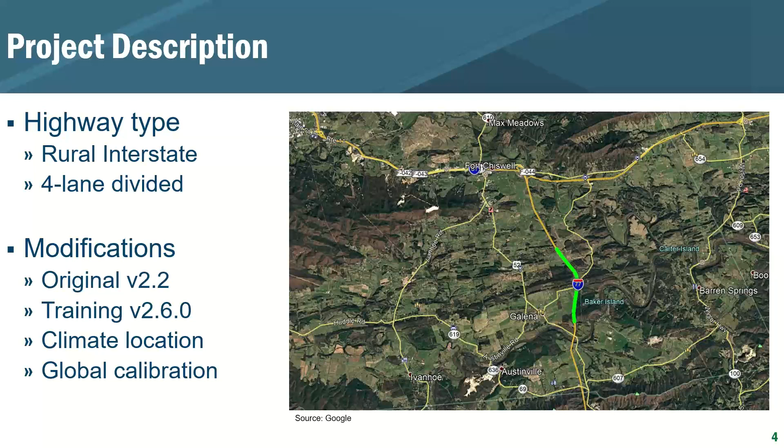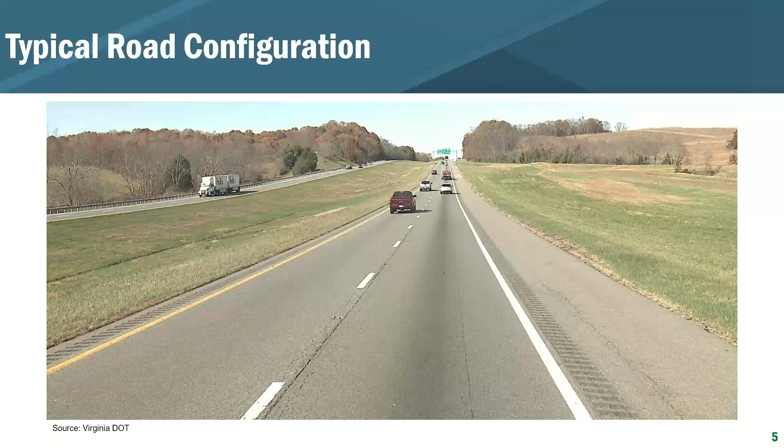So the typical road configuration, you can see there's a bit of centerline cracking, and it looks like some fatigue in the wheel paths. This is just the typical layout of the road, to give you that perspective.

The bigger issue now is alligator cracking and the presence of transverse cracking — alligator cracking shown as circles, transverse cracking as triangle shapes. You can see a better trend here, showing that in 2010 there was a little more than 15% alligator or fatigue cracking and about 3,000 feet per mile of transverse cracking. So the predominant distress for this case is cracking, more so than rutting.

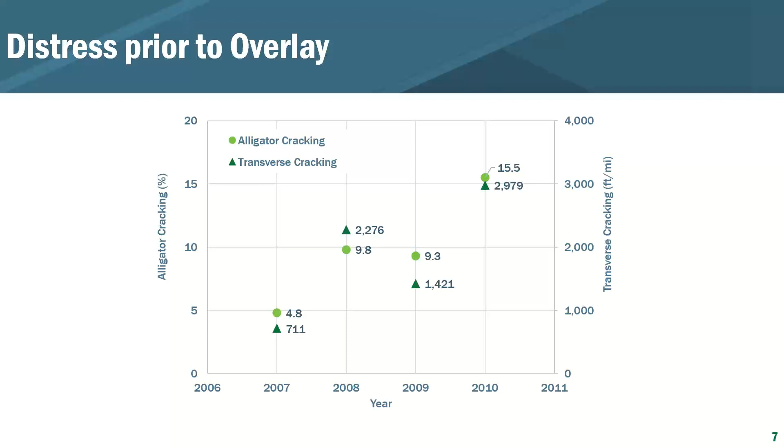Now what I'm going to do is go through a demonstration of the software — during a webinar, as you know, that's just a recipe for failure. So what I'm going to do instead is go through screen captures and try to demonstrate the process that way, and hopefully that'll be good enough information that you guys can follow along.

I'm just going to tumble through PaveME inputs, top to bottom on the left-hand side of the input screen. The first one shows that we're going to do an overlay of an existing asphalt pavement. Design life is 15 years. The original was built in '78, and construction was in June of 2010, with traffic loading starting September of 2010.

For the existing pavement, as you see on the right-hand side, we've got the overlay thickness, 12 inches of existing asphalt, 8 inches of aggregate base, 6 inches of fill material with a CBR of 30, and an A-7-6 AASHTO subgrade classification.

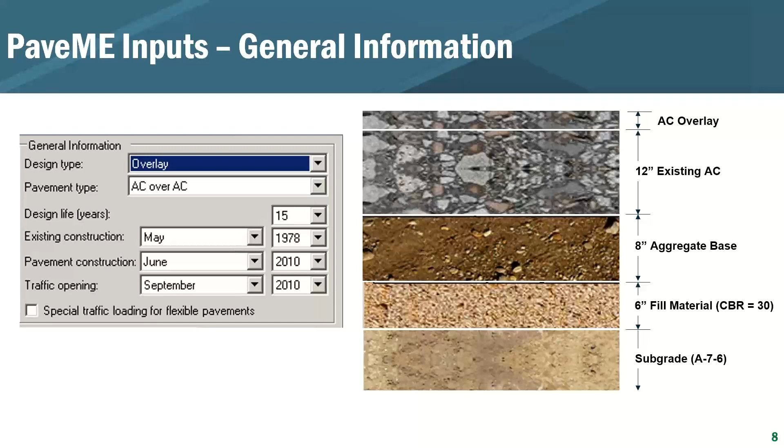As far as performance criteria goes, we got initial IRI of 63 inches per mile with a terminal of 140. Then you can see the fatigue cracking, top down, bottom up, the amount of thermal cracking, deformation, or total rutting is a little bit more than a quarter of an inch, with the majority of that happening within the asphalt layer, or being limited to the asphalt layer.

And then total reflective bottom-up cracking is at 25%, and then total transverse cracking, thermal and reflective, is at about 2,500 feet per mile. And again, as is classic, you can set the reliability, except for bottom-up fatigue cracking and thermal cracking, that is set at 50% reliability.

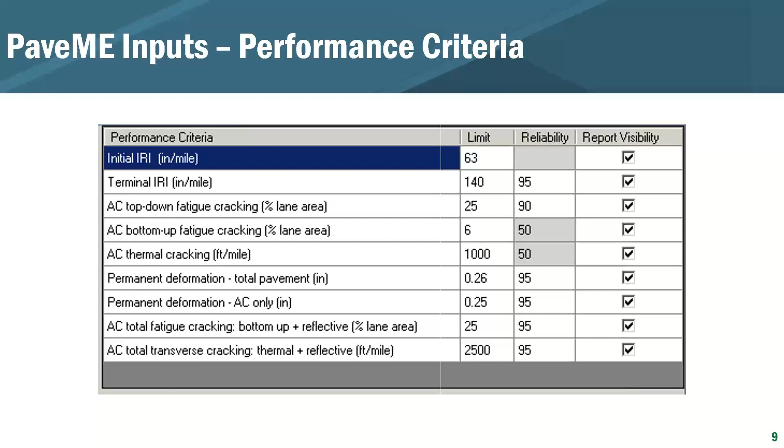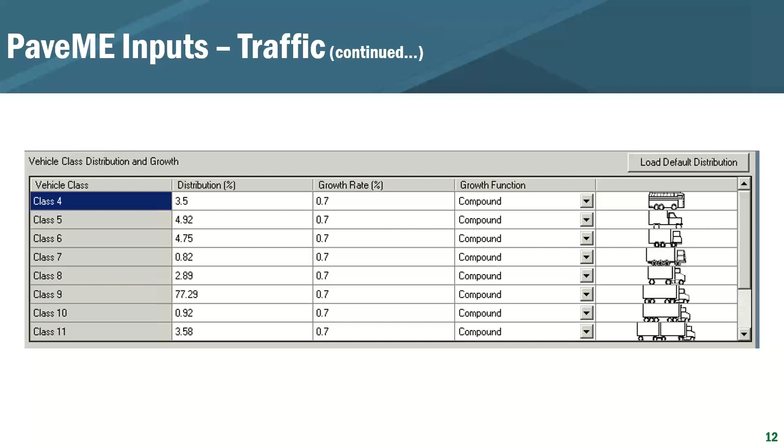The distribution of vehicle class and the growth rate, again, I think it's just taken from the traffic information, and then the DOT used a growth rate of 0.7% compounded over the life. For this one, I think this is kind of the classic for most interstates. It's pretty even, January through December, for class 4 through all the classes, class 13 here in this case. So that was just pretty typical for an interstate.

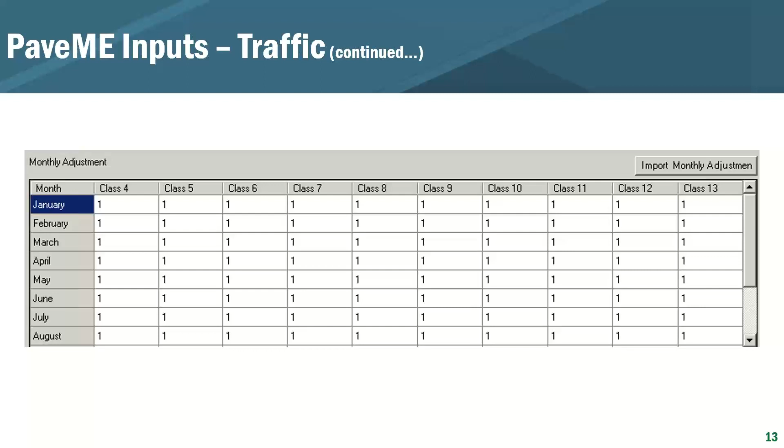There really isn't a monthly adjustment that I think most DOTs see on some of the higher class routes. Then of course you have to have your axles per truck by vehicle class, single, tandem, tridem, and quad. And again, these are taken from the traffic studies or the traffic information that the DOT contains or collects, and so are part of the traffic database for sure.

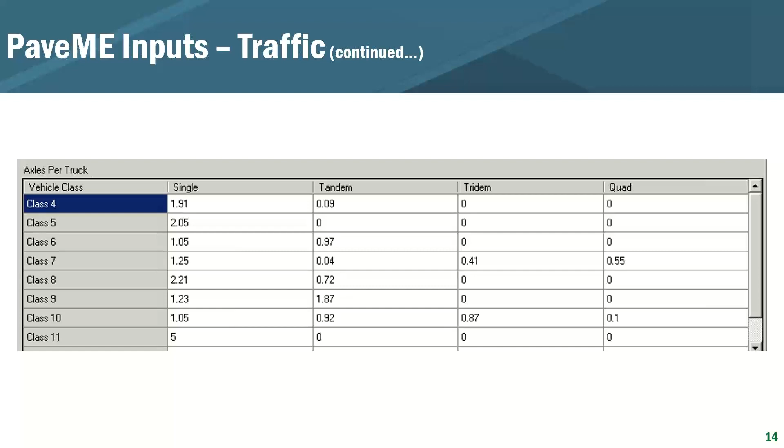As far as the AC layer properties go, there's a number of them. Certainly going in and doing an interface, doing the endurance limit, whether you include it or not. And at least in this example, we did not use the endurance limit, but you do have to go through in the AC layer properties location and identify the rehabilitation level. And so you actually get a couple of choices. Certainly you can go level 3, level 2.

Level 3 gives you much more of a general condition, where with level 2, you can actually get into more specific details of the presence of distress. So both of them have the ability to include the mill thickness, which in this case we use 2 inches. They also have the ability to put in rut depth, so you can do those regardless. But certainly where they differ is in this structural rating, environmental rating versus actual distress. And if you've got the data, it is always best to use it.

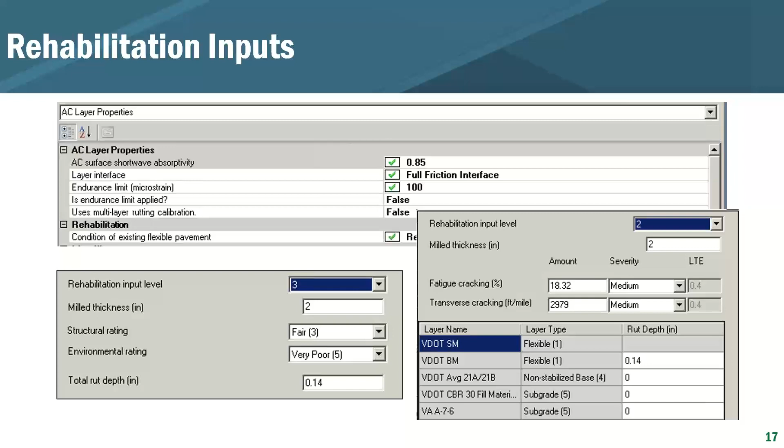All right, getting into the AC layer properties. Again, a lot of this information, hopefully, if you've got it contained in your materials database, that's been transferred over, and so we can go ahead and use that from the Virginia file that we were sent. We had all that information, and so we'll go through the inputs a little bit one by one, but much more in general. Again, I don't want this to be an exercise of entering data into the software. So we'll just hit the highlights of what was used in this training module.

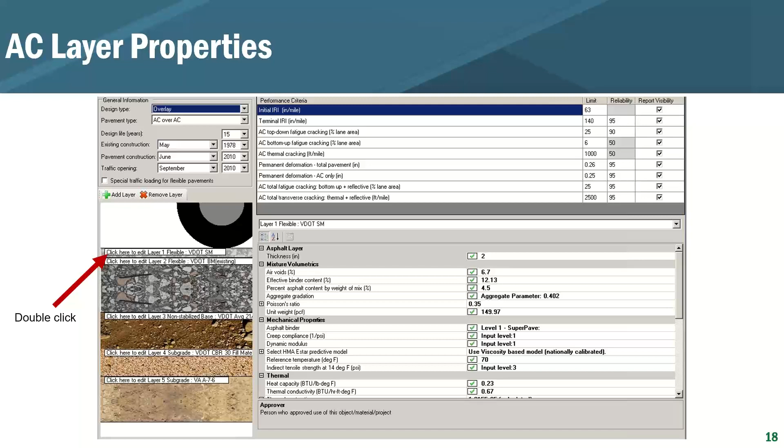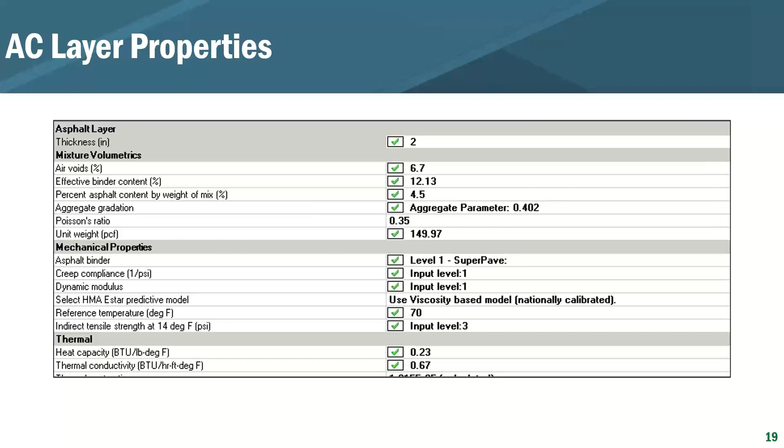All right, so as many of you know, you double click on the layer in question to be able to edit it, and that brings up the tab where you can see your thickness, your mixture, your mechanical properties, and your thermal properties. The aggregate parameter allows you to input your sieve sizes on the 3/4, 3/8, the number 4, the number 200. Going down for the Superpave or the level 1 on the mechanical properties, if you have that information, put in your temperature, your binder G-star, as well as your phase angle.

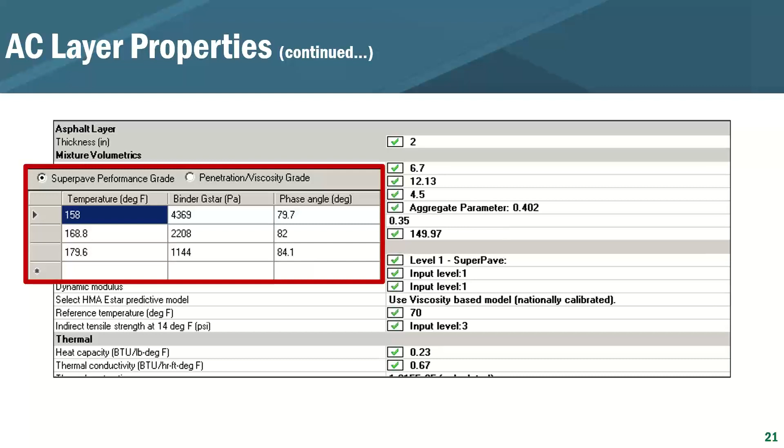Same with creep compliance. You can load in that information. Similarly with the dynamic modulus. And for both the creep compliance and dynamic modulus, you can change your level of input. So if you put these into a level 3, I don't think you can see my cursor, but it'll change that top defining point from level 1 Superpave to a level 3 when you change your dynamic modulus and your creep compliance back to those values.

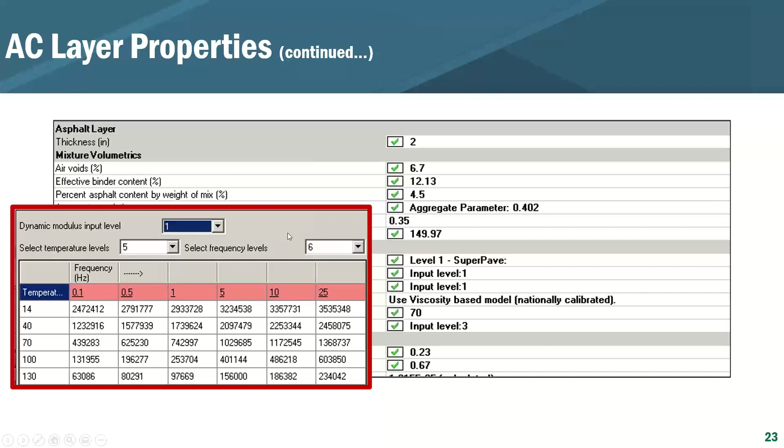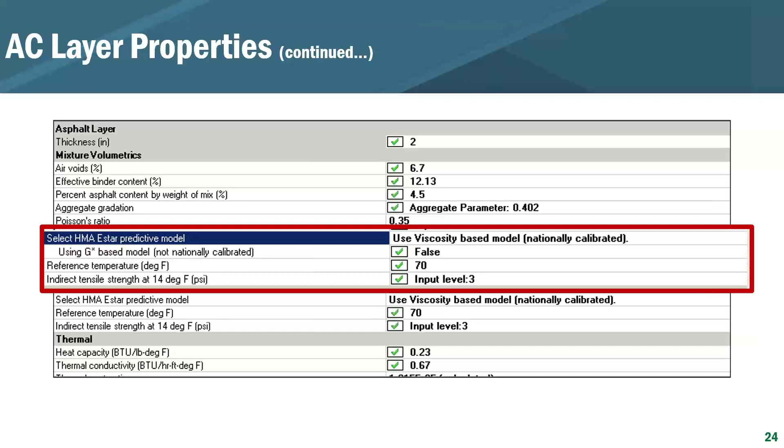And the indirect tensile is the same. You can either use a level 3 input, or you can use the G-star based model, however, it's not been nationally calibrated. So I know for the most part, a lot of agencies are using the viscosity-based, nationally calibrated model. But you have the ability to change that, to change the reference temperature and that type of information if needed.

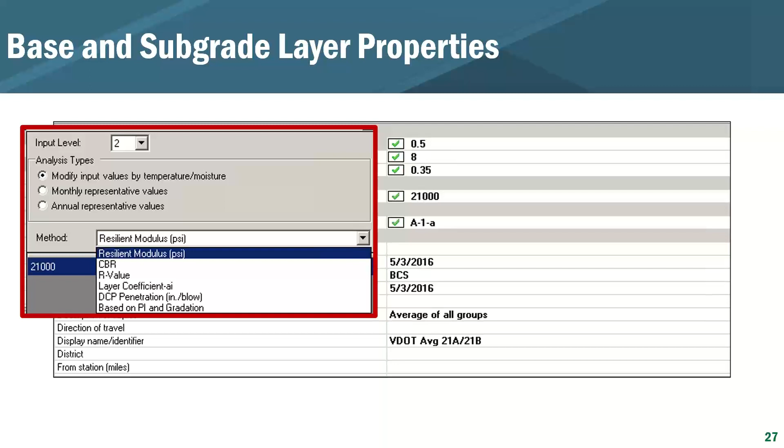All right, similarly, double clicking on the base and the subgrade layer properties, the modulus is of interest. You have the option of input level, and for input level 2, you can select your type of evaluation, be it resilient modulus, CBR, R value, and then put in that value for that method. You can also change or select your gradation, putting in the gradation, the liquid limit, the plasticity index, all that information. Or you can do level 3 and just select, hey, I've got an A1 soil, and bring in all the information needed for the analysis.

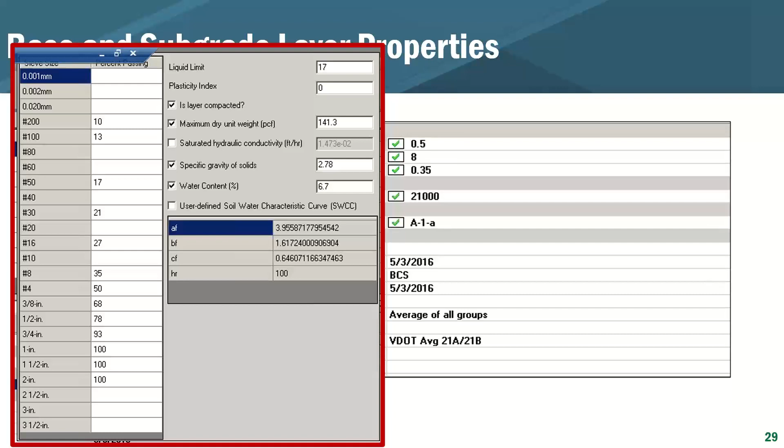Similarly to the asphalt, I summarized the unbound subgrade and base layer materials. As we noted, the non-stabilized base is 8 inches over 6 inches of fill over the subgrade. And you can see the coefficient of lateral earth pressure, Poisson's ratio, modulus, and sieve and soil type for each of those layers.

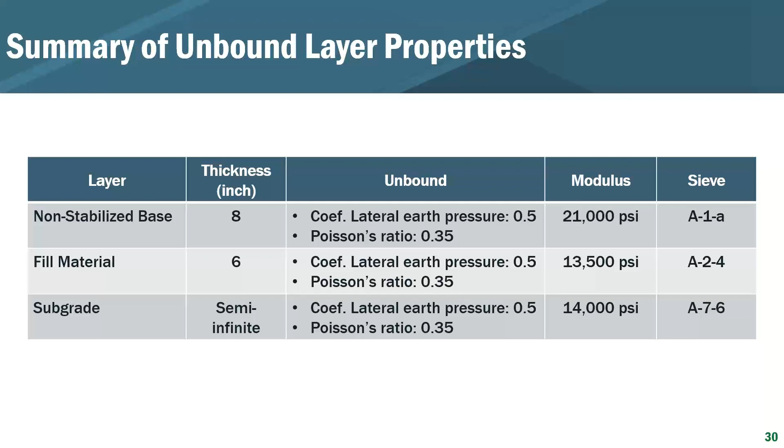But it's always interesting to see the impact of the heavy trucks over the time period. It's always surprising how quickly 15 years of traffic accumulates. I have to say I still miss ESALs, but I know the switch to heavy trucks is happening, but it's certainly slow, at least for me.

All right, so what I wanted to go through is kind of evaluation scenarios. And again, I think what is intriguing about PavementME certainly is the process it goes through, the whole mechanistic empirical. But I think, what do you do with the output, right? Is it just something that hopefully everybody's getting a good sense, getting a good feel for the impact of changes to designs and how that influences performance. But also it's something that hopefully you're not working in a vacuum.

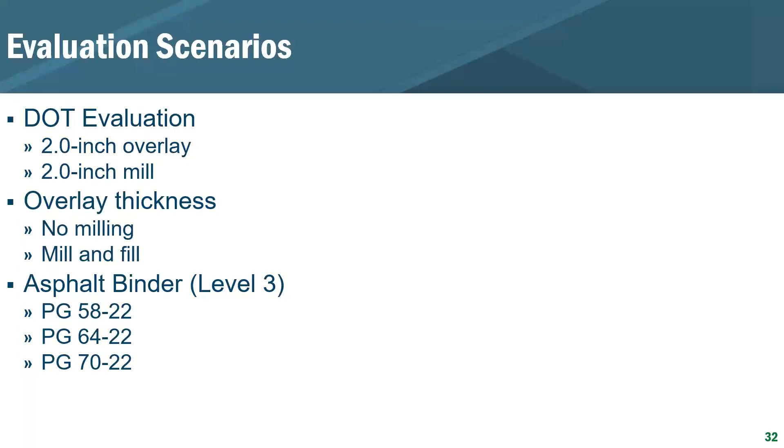All right, and so here again, I'm not going to drag you through all the various database or the various tables and graphs that are populated in the output of the PMED runs. So I'm really just going to focus on the condition, the target value that we used in the analysis, and then there's going to be a series of columns that get added to this table that kind of demonstrate the evaluations that we did. And again, just to remind you that we're looking at 95% reliability except for the bottom-up fatigue and thermal cracking, where we used the 50% default value.

All right, for the 2-inch overlay where we did no milling, certainly the IRI fails to meet the criteria. But I also would have to say, and I know Harold has said this many a times in our past meetings, don't change your overlay thickness because you're trying to meet IRI. And I completely and totally agree with Harold on that. Again, there isn't a performance-based information in PMED. Certainly, as many of you remember, they had to make a lot of assumptions in being able to predict IRI.

And I guess my other comment too would be that Virginia had great IRI on this road prior to the overlay, and even though their target is 140 in their design process, we didn't see that type of effect on the previous road. It was maintaining a pretty low IRI throughout the process. So again, I think you always have to take IRI with a grain of salt before just saying, yep, I got to make my pavement thicker, or I've got to change something to meet IRI. So always be leery with that one.

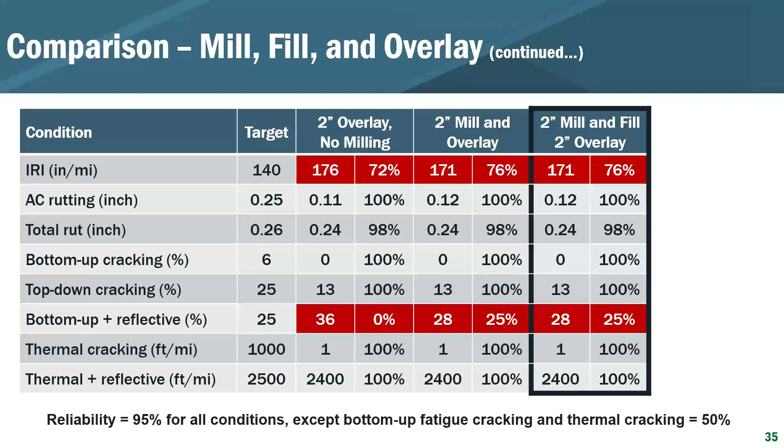And so I did the classic thing that we probably shouldn't always do. I said, well, what the heck if I make it thicker? So I'm going to put down a 2-inch mill and fill and a 4-inch overlay. So a total of 6 inches of new asphalt on top of it. And I'm sorry, this slide's slightly different. You're still not making it on IRI, so it's still a little bit low. But again, with 2 inches of milling plus 4 inches of asphalt, the contractor has more than sufficient opportunities to improve your IRI. So I'm not really concerned about the IRI in this case.

But the good thing is I have now reduced my amount of bottom-up and reflective cracking. So I've gotten rid of the reflective cracking problem by going to a really thick overlay. And there's absolutely no attempt to try to mitigate reflective cracking by doing something different. This is purely an exercise in asphalt overlay thickness that gets rid of that reflective cracking. And that's maybe not cost effective. There may be methods that a DOT knows help minimize reflective cracking. And so certainly those types of activities should come into play rather than just automatically increasing the asphalt overlay thickness to get rid of some of the distress types.

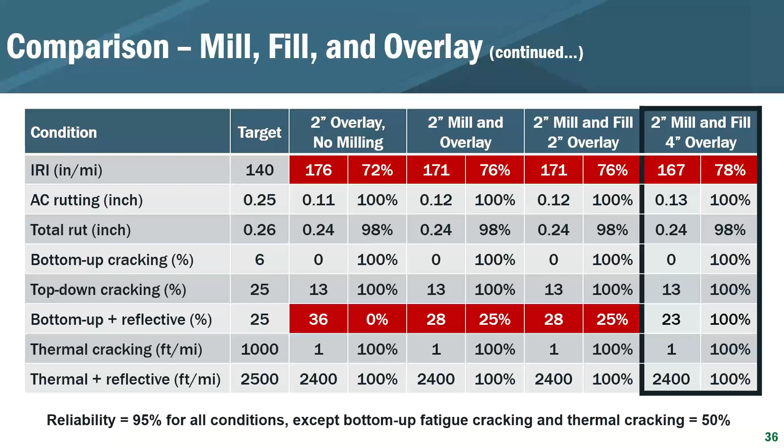All right. And this is just a caveat in the manual of practice that pretty much says the information obtained to develop the models used for the global calibration was based on information that may not have shown that there was a difference. So in the LTPP, there wasn't really much of a difference in performance, mill versus no mill, using an interlayer or not, using a seal coat or not. And certainly if any difference does exist between a mill and no mill situation in your agency, then those should be used in the calibration process. But the globally calibrated models did not show a difference.

So I think that's where you saw that I had to keep on adding asphalt thickness; the impact of milling really wasn't there by itself. However, if your agency sees a benefit in milling, seal coats or interlayers in mitigating reflective cracking, then make sure that you actually have some type of local calibration in those instances.

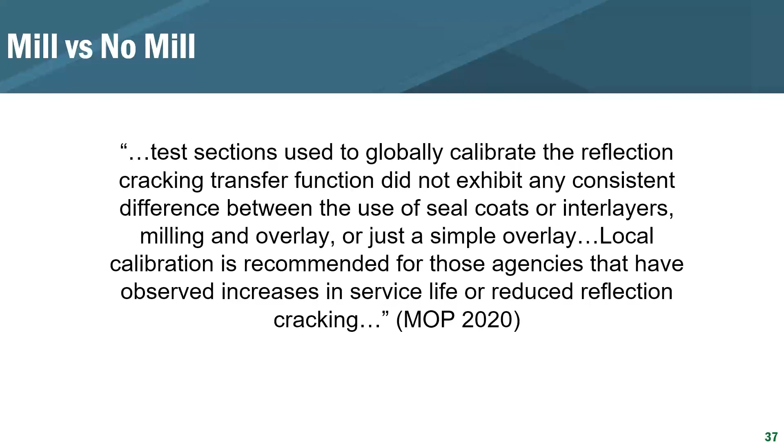All right. So with that, I also said, okay, well, let's go back and let's see what changing the binder grade has to do with it. And so I had to disconnect the level 1 material properties for the asphalt overlay. Since I don't have Virginia's material database, I said, it's okay, I'm just trying to demonstrate the difference rather than give an absolute value. So I went in, changed the inputs on the asphalt layer to allow me to put in a level 3 and put in the PG grade.

So I did it for the PG 58-22, and again, completely and totally ignore the comparison of the values I'm going to show in these tables with the ones from changing the asphalt overlay, because it's an apple to orange comparison and really shouldn't be used. So try not to go, wait a minute, how come all my rutting is higher? Because it's different. It's a different process to do the evaluation.

Here again you've got an urban highway type, a 4-lane divided roadway, and the same type of modifications we had to make to get the evaluation to work in the current version of PMED. Justin had provided the original file based on version 2.3; we used version 2.6. So again we had to do a slight change in the climate location, as well as use the global calibration coefficients rather than the ones provided by Justin.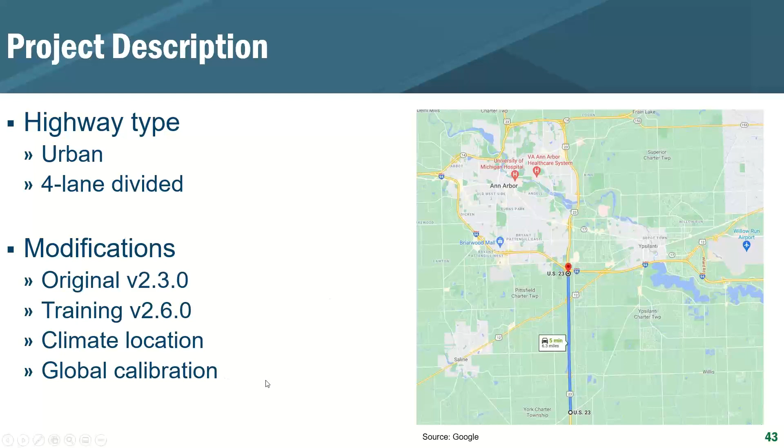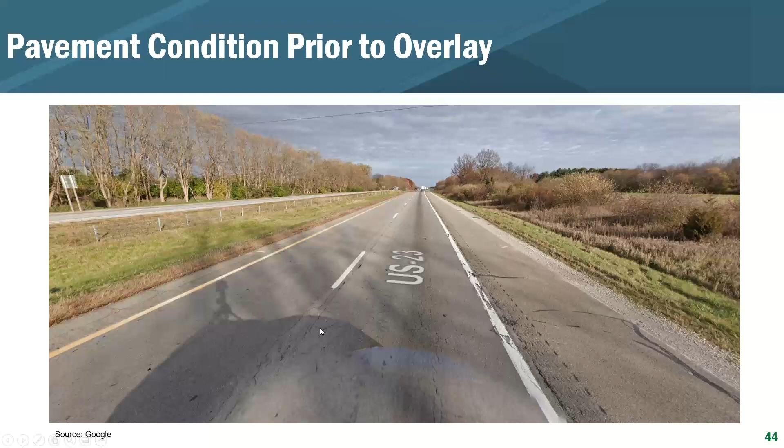For this, the Michigan DOT uses an initial IRI of 67, terminal of 172, and similar reliability as before. It also uses 50% now for thermal cracking, as it does with the AC over AC case.

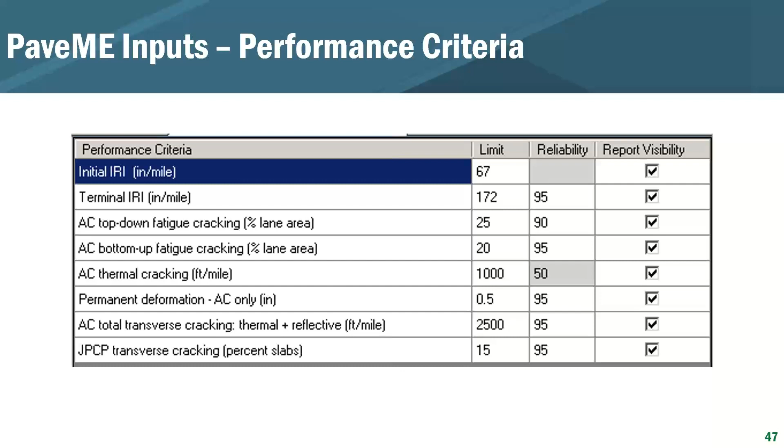In this similar case, we've got the AC overlay. The existing asphalt is 2 layers, one 2 inches thick, the other 3 inches thick, over 9 inches of JPCP. There's a 4-inch aggregate base, 10-inch sand subbase under that, sitting on top of a clay subgrade with a liquid limit of 33 and a plasticity index of 15.

Again, we're using an asphalt overlay of a JPCP and looking at a 20-year design life. The original concrete was built in 1961, with the new asphalt being placed in 2023, a couple years after the 2019 date, so the pavement obviously continued to deteriorate between 2019 and the intended overlay in 2023.

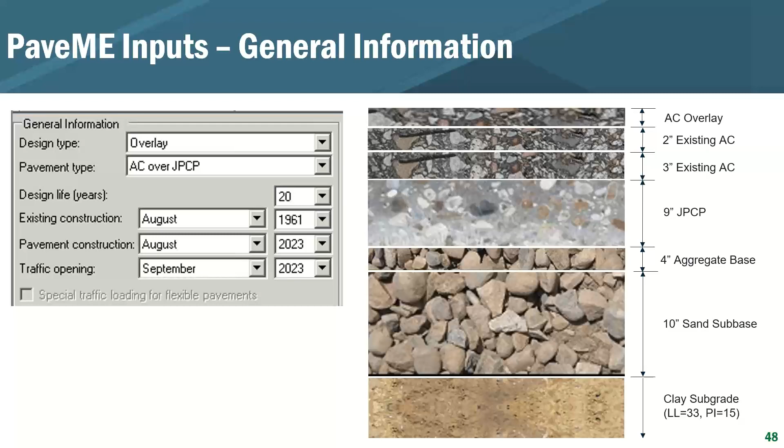Similar to the asphalt over asphalt case, there are traffic inputs here, and I'm just showing this so you get an idea of what information was used. Two-way AADTT was about 7,900, with a 51-49% split in the direction of traffic, and 92% of it is in the design lane for this analysis.

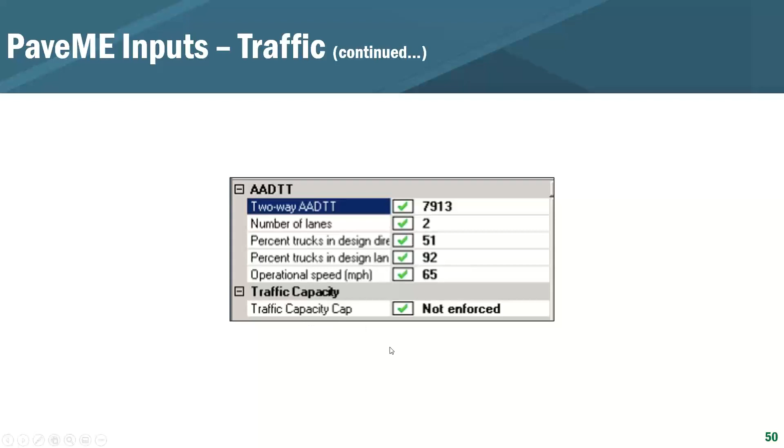And again, the DOT did not put a traffic capacity cap on the analysis. Growth rate in this case is going to be very much highway specific, but here the DOT is looking at a compound growth rate of 0.75% for all vehicle classes.

The distribution here for this road is different depending on the type or class of truck as well as the month. I'm only showing you through August for simplicity, but there's a similar type of variation in traffic for the remainder of the months. So again, it's based on your traffic information, and hopefully this is in a database so nobody is typing in all this information, which I know the majority of DOTs have traffic databases.

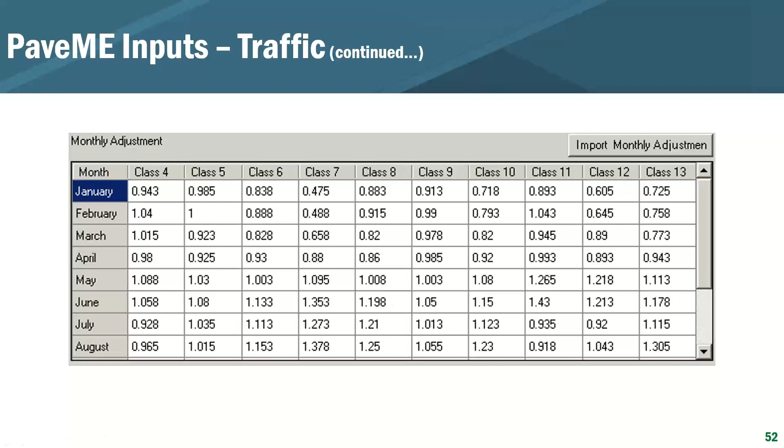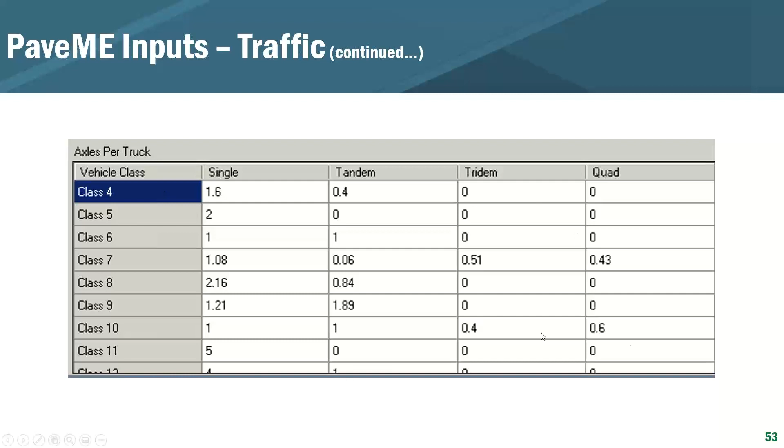That's a good thing. Similarly as before, you're able to vary the class of truck by single, tandem, tridem, and quad axle configurations. That's pretty standard equipment and information. Here again, being able to pick a location of the project in Michigan - we had it slightly different than what was provided, but it's still pretty close to the information we were able to grab.

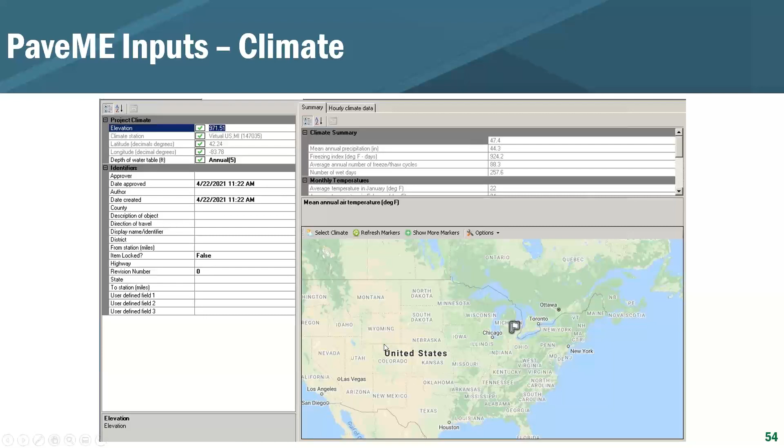Different from the AC over AC case, for the AC over a JPCP you need to go in and include the design properties, so that we know the dowels used in the jointed plain concrete pavement, the joint spacing, and all that type of information needed to help in performance prediction, and certainly for quantifying the continued damage in the JPCP layer.

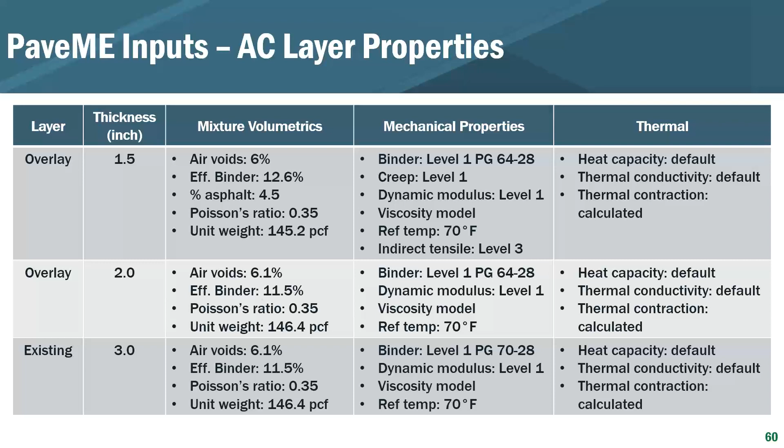As far as the base layers, I didn't go through all the inputs showing you those screens because they're very similar to the ones used for asphalt over asphalt. On the base and subgrade layer properties, the coefficient of lateral earth pressure is the same as used in the AC over AC. These are default values, so that makes sense.

For that non-stabilized 4-inch base, it was an A-1-a soil with a resilient modulus of 33,000 psi. The sand subbase at 10 inches was 20,000, sitting on a somewhat soft subgrade with a PSI of 5,000, which I think would be typical of what we'd expect for a clay type subgrade.

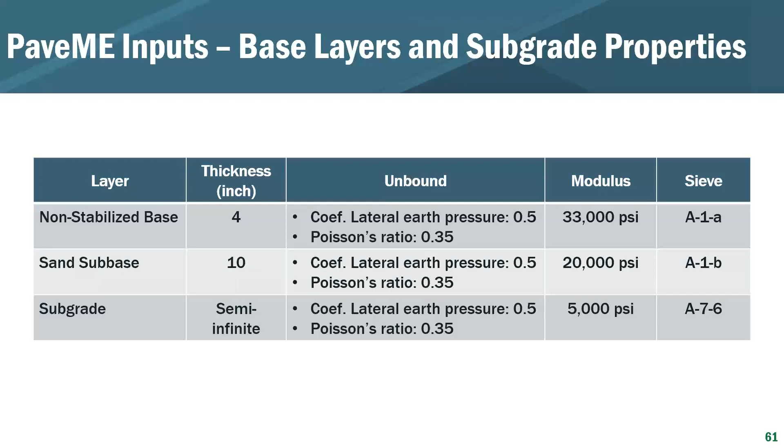This is just my little check to make sure everything is doing as expected. This shows that the existing overlay is 3 inches with the 3.5 on top. Perfect, that's what we wanted.

The original heavy trucks figure is 7,900, and then that progresses over the 20 years to reach 29 million by the time we get to 2043, as far as cumulative trucks go.

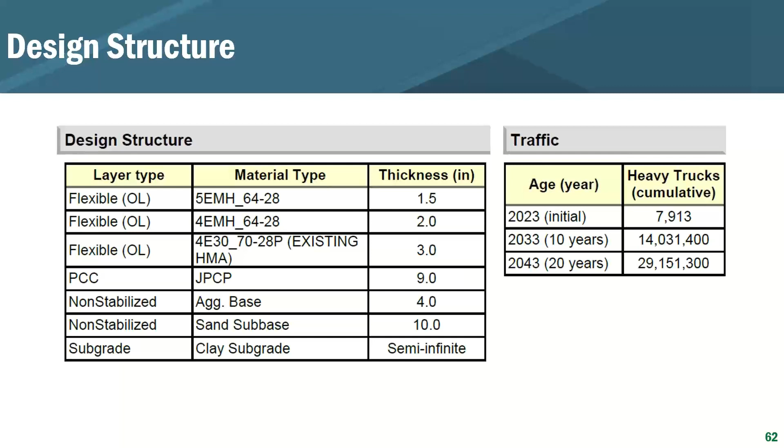Similar to the AC case, I looked at what happens if the original design by the DOT was 3.5 inches, and they repaired 2% of the 10% of distressed JPCP slabs prior to the overlay. I wanted to see how repairing versus leaving slabs distressed impacts performance. So I compared having 10% distressed slabs and not fixing a single one, versus having 10% distressed slabs and fixing every single one, to see how that varies the performance.

Looking at just the slab repair scenario - I've got 10% distressed slabs and I'm not going to fix a single one of them. Everything as far as IRI and rutting in the asphalt layers all looks good. The bottom-up cracking looks great - nothing happened there.

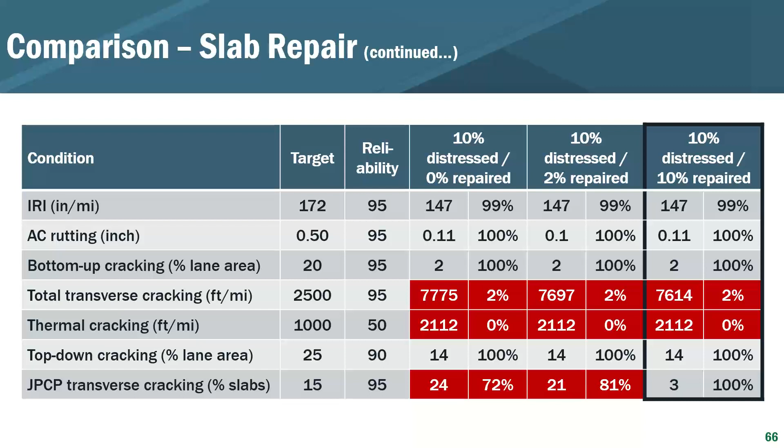All right, so what happens, oops, sorry about that. So what happens if I say, you know what, I'm going to change the overlay thickness? And so I left fixing all the distressed slabs. Again, I had to pick one, so I went ahead and picked that one, just so that we can more focus on the impact of total transverse cracking and thermal cracking, more so than, hey, we still have a transverse cracking problem in the JPCP.

By going to a 5-inch overlay versus the 3.5-inch overlay from the DOT, we actually improved the total transverse cracking as well as the thermal cracking, but not significantly enough to meet the target criteria. So we're still at twice the amount of transverse cracking that we wanted, and twice as much thermal cracking. So again, you're not going to solve some of these problems in thickness alone.

And again, I know that's something we kind of continue to discuss. Even with the AASHTO 93 guide, you never can solve all your problems by a thickness increase. And so that still holds true, and you shouldn't be trying to get rid of something by increasing the asphalt thickness, because I can tell you it won't.

I didn't try running it thicker, but I think you've got to do some other type of mitigation efforts to be able to handle that, as well as knowing that if in your agency, so Michigan maybe says, you know what, the 1.5 or the 3.5-inch overlay actually helps mitigate transverse cracking, then that's going to show up in your calibration effort, right?

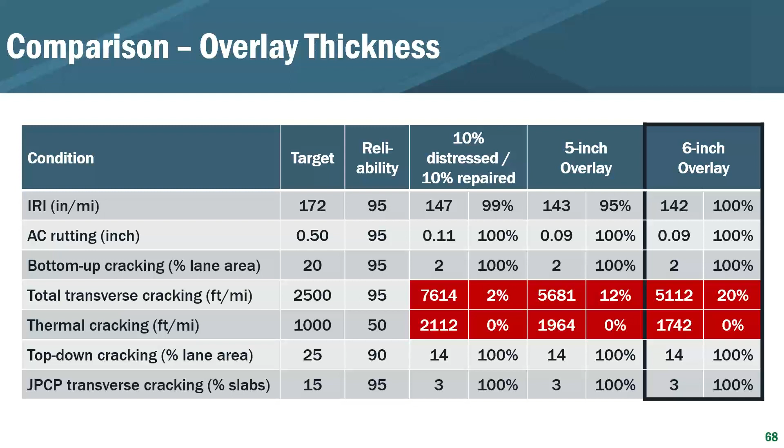So again, I've almost doubled the asphalt overlay thickness, and I'm still not there. I'm still at twice as much transverse cracking as I want, and still haven't really made much of a dent on the thermal cracking. I did it knowing full well that it wouldn't, but I wanted to show that it still is a problem that you've got to overcome in some other fashion rather than just thickness alone. All right, that was probably even quicker than the AC over AC.

So Kelly, do we have any questions? We do have some questions, yes. Let's start off from the beginning. The first question is, do you recommend using average or weighted average distress values as input values? That's a very good question.

So this kind of gets back to a pavement management question. So if by chance you have an absolutely perfect road sandwiched between pavements that's falling apart, I would not use average, or even a weighted average for that matter. I think if you have performance that is drastically different throughout the project length, I would absolutely go through a segmentation process and try to identify locations.

Now, if they're not statistically significant, you could probably just go ahead and do a weighted average. But I'd refer back to a pavement management type of approach. Significantly different, you should evaluate them separately.

Very good. Another question is, were you using statewide average truck data, or were those site-specific values? I believe, and I'd have to go back to Justin on this, but I believe it is site-specific. And Justin just weighed in and said it's clusters. Cluster information. Okay. Yep. Thank you, Justin. And PTRs.

All right, well, thanks a lot. And first I want to thank Lydia Peddicord with Pennsylvania Department of Transportation, and Tom Adams, who was formerly with PennDOT, as well as Greg Tomon from Lindy Paving, in providing the project. And as I knew Linda would do and did do a great job in talking about how to define the inputs. A lot of them are similar, of course.

So I'm going to focus mainly on the inputs for fractured concrete pavements, and the focus is on how to interpret the project such that you can define the input. So thanks again to Lydia, Tom, and Greg for providing the opportunity to do that. They presented the project information with some great design information so that I was able to do that. And again, this will be crack and seat slash break and seat and rubblization.

And just kind of a review, and I saw in the poll questions, very few people are using Pavement ME for designing these types of pavement structures. And maybe that's because they don't do a lot of this type of a pavement structure, but hopefully through this presentation, maybe you'll have a better feel for how easy it is to use Pavement ME as a design tool for these types of pavement structures.

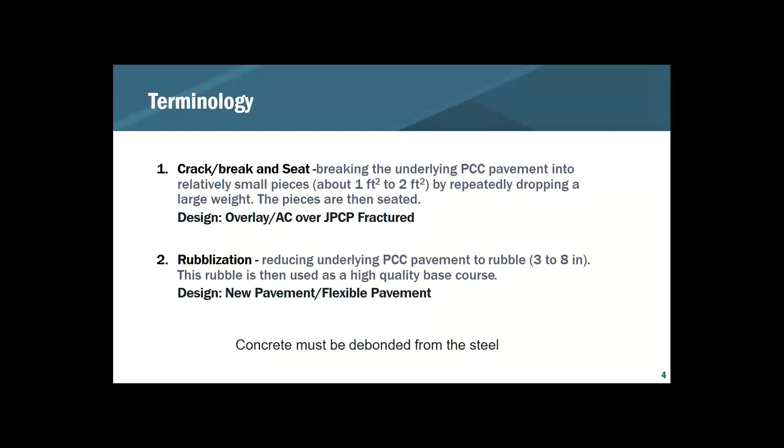And the big thing too to remember is that when you're performing this, you want to make sure that you're debonding the steel from the concrete. So the idea is that you'll have nice aggregate interlock in between particles, regardless of whether you're rubblizing or doing the break and seat. So what I was going to do with the project that PennDOT was nice enough to provide the information on is first talk about it from a break and seat perspective, and then look at rubblizing.

So when we're looking at break and seat in this situation, the design inputs that are more closely affiliated specifically with a break or crack and seat are the performance criteria, where you're looking at the AC total transverse cracking, and that's including thermal plus reflective. And the design criteria has thermal cracking separately, but also then thermal and reflective, where the distress in the concrete underneath reflects up. And hopefully, again, the whole idea of the break and seat or the rubblization is to make sure you're not getting that reflective distress.

So in the design type, as I just briefly mentioned, for the break and seat, that's going to be an overlay design, and you're going to then select the subcategory of AC over fractured jointed plain concrete pavement. And then, this of course is a jointed reinforced, and there's a question that came up regarding the difference before, but it's going to be the same, and you want it to behave the same underneath if it's a crack and seat or a break and seat where you have the reinforcement. So both of them, again, if it's jointed reinforced, you want to make sure that you're debonding that concrete from the steel, so then they'll act in a similar manner.

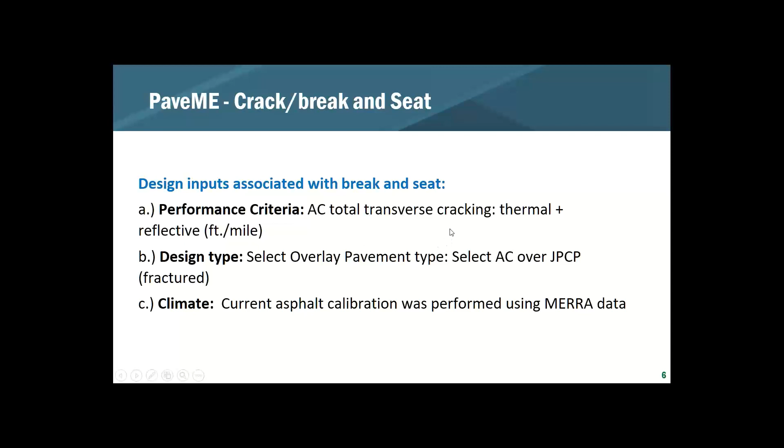So when we get to the layer of the fractured concrete, there's a couple of inputs that you want to define, and that's crack spacing, and that's going to be a range recommended of 1 to 3 feet that you'll want to select within, and then the fractured slab load transfer efficiency. So as we had mentioned, we want these segments to be fractured, but we want to have interlock in between them, aggregate interlock, so that it's engaged in transferring load, which of course helps prevent reflective distress. So then the load transfer efficiency recommended between these segments is 30 to 90%.

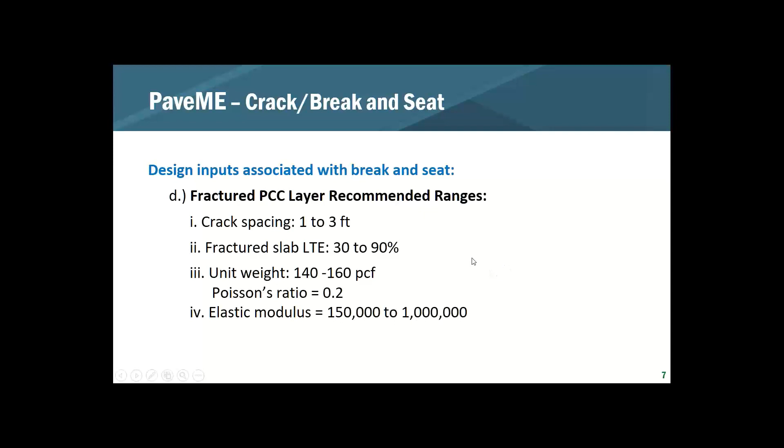The unit weight is just typical of that of concrete and Poisson's ratio. And then the elastic modulus, the suggested range, and I apologize, I forgot my units here, is 150 KSI to 1,000 KSI. So 150,000 to 1,000,000 PSI is what is typically recommended, and we'll talk a little bit more about that later.

Okay, so going into the project itself, the location of the project just coincidentally happens to be right outside of Pittsburgh, Pennsylvania, which of course is where I'm located. So this was kind of nice to have it nearby. Provides me with a better understanding of the site conditions. But it's a 13.7-mile section, again, it was jointed reinforced concrete pavement. So you can see the city of Pittsburgh here, and then this was just northeast of that a little bit up the Allegheny.

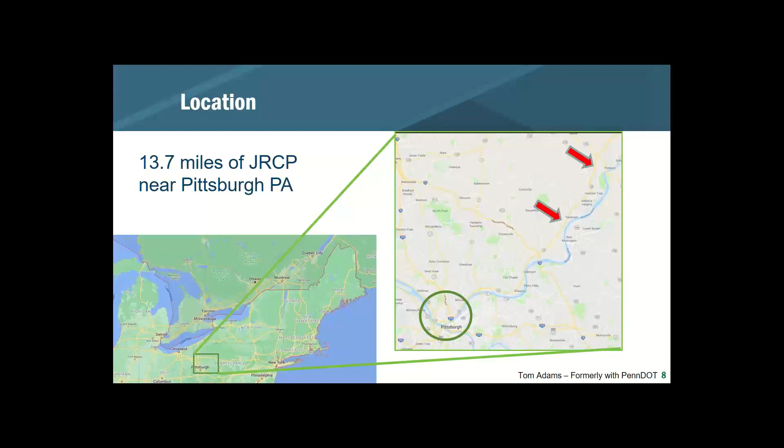So the project history then, this existing reinforced concrete pavement was constructed in 1984, 25-foot dowel joints, and there was concrete pavement restoration performed in 2009, and then again in 2004, and then the break and seat was performed in 2021 and a 35-year design life was used. The CBR for the subgrade in this region, Pennsylvania uses the California bearing ratio, was 3 to 5.

So of course the support condition is a relatively soft subgrade, which is always a point of interest when you're trying to do a break and seat or crack and seat or a rubblization. And obviously you have to impose a lot more energy into the slab if you're going to do a rubblization. And it's hard to do that with such a soft subgrade, and I believe that's why PennDOT chose to go the break and seat route as opposed to rubblization.

So there wasn't a lot of information regarding the distress prior to the overlay, but as you can see, there was a lot of patching, and again, it was noted that this was done in 2004 and 2009. So extensive work on the roadway prior to this. As you can see, it's a 4-lane divided with 2 lanes per direction, and the speed limit in this area is 55 miles per hour.

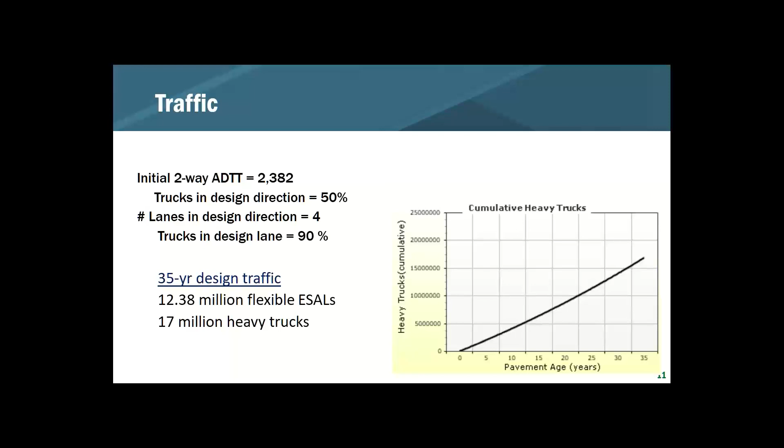Like I said, I do still look at both ESALs and heavy trucks when I'm looking through this, and you can find the ESALs in those files in the analysis folder. All right, so the current structure, this JRCP was 10 inches thick.

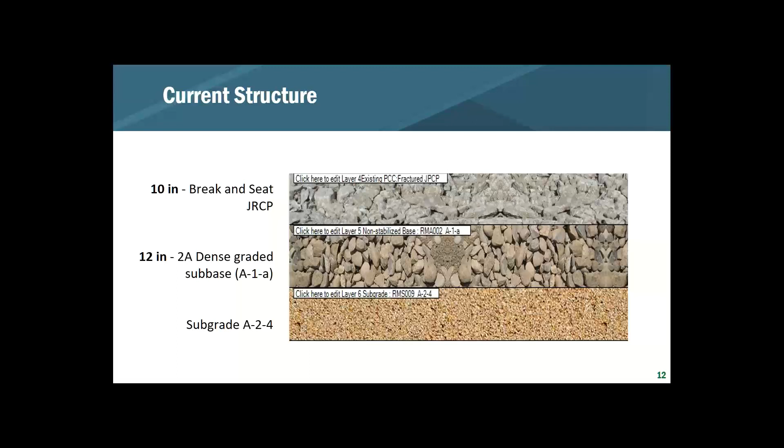And that was on top of 12 inches of a dense grade sub-base. For those familiar with PennDOT materials, it's a 2A, which again is a nice densely graded sub-base material. The subgrade was classified as an A-2-4.

And even though this is a webinar on Pavement ME, regardless of what design procedure I'm using, I typically try to look at a couple of different design methodologies, because they all have different development; they're based on different theories and using different data to develop them. And so I always find it interesting to see what the other ones give, but it also helps me interpret the results of each individual design procedure.

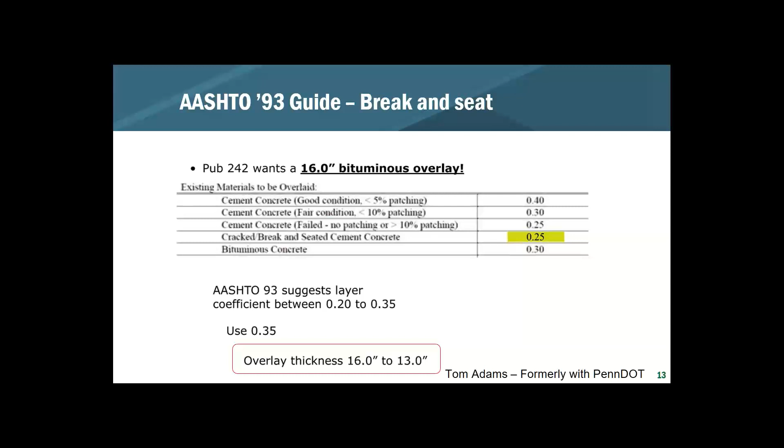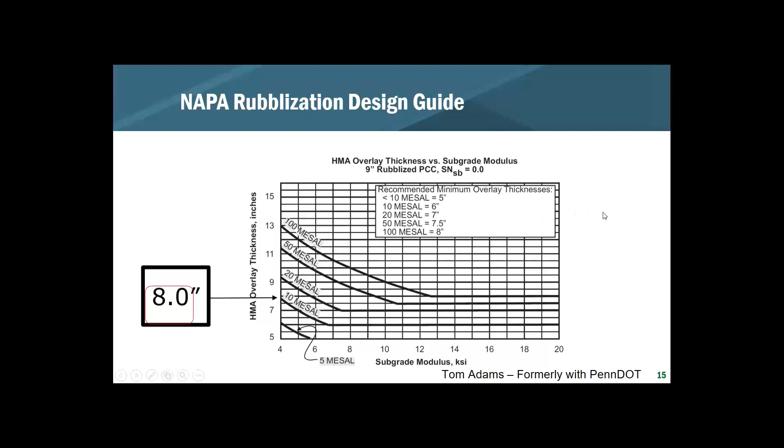But obviously that's a big jump, and so they were trying to get a bit more comfort, and so they used the NAPA rubblization design guide, and that came up with 8 inches. And then they talked to several other agencies. I think Tom had mentioned he looked a little bit at what Illinois was doing for something similar regarding the level of traffic and the site conditions, and they had some pavement structures out there where they did break and seat, crack and seat type of rehab with 8.5, and they felt that they got their expected performance out of it.

So just a little bit of background regarding what values they came up with outside of Pavement ME, and then jumping into Pavement ME itself. So with Pavement ME, this is the break and seat design that I'm going to go through now. As we had mentioned earlier, the design type is an overlay, and then it's AC over JPCP fractured.

The question came up before regarding whether it's a JPCP or a JRCP. That's just one option. Even with a JRCP, if you're just putting an overlay right on top of that, Linda had mentioned that you can probably just use a jointed plain. And if you do have ruptured steel at mid slab, for example, this would be a 25 foot, and you found that most of it had ruptured steel, you could just make it a 12.5 foot joint spacing, and that might get you something in the ballpark. But for this, it doesn't really matter, because you're going to fracture it into small fragments regardless of the size.

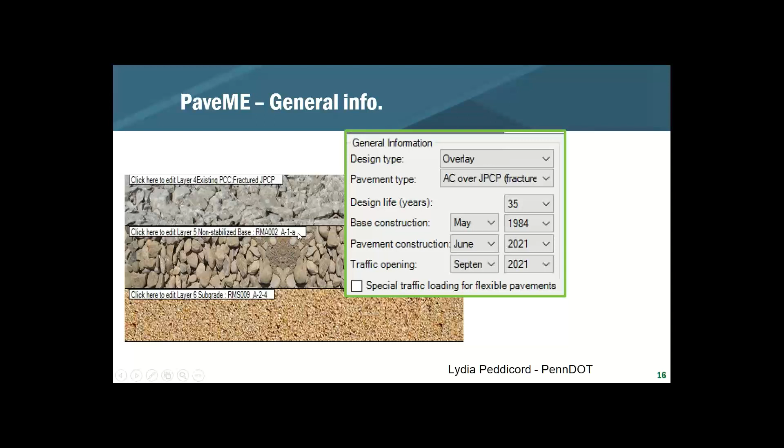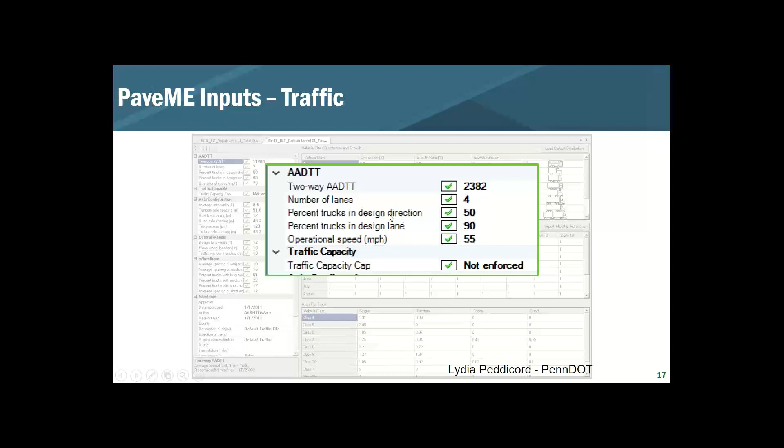So the traffic, I'm not going to go through traffic inputs. I think Linda did a good job describing that, and you're probably pretty familiar with how to do that at this point. But the traffic, as you can see, is not very high. The capacity wasn't enforced, but of course it's nowhere near capacity, so that's irrelevant. Only about 2,000 trucks a day. So not a lot of traffic, 50% in each of the design directions, and 90% of the traffic was assumed to go in the design lane. That equated to a little over 12 million ESALs throughout that 35-year design life, and 17 million heavy trucks.

Climate: the MERRA data, of course, was used for the site in the Pittsburgh area. I think at this point, that's similar with all of the other Pavement ME designs. So I won't go into the details, but just to give you a feel for what the climate is in this location as we look at the different types of distresses that develop. We do get some winters and snow, but it comes and goes relatively quickly. So we have a lot of freeze-thaw cycles and not really a deep freeze. We do get a lot of rain, so there's a lot of precipitation.

The fractured slab load transfer efficiency, again, this was in between 30 and 90%. You can use the FWD to get an estimate of that potentially, but based on this design, it really didn't have a big influence on the predicted distress.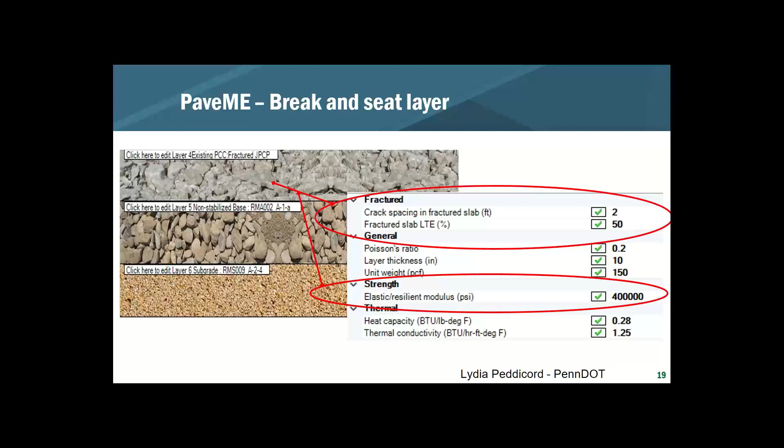And I do think that Lydia was on there because she had a comment or a question, so that's nice as well if we have any additional questions that she might be able to help us field.

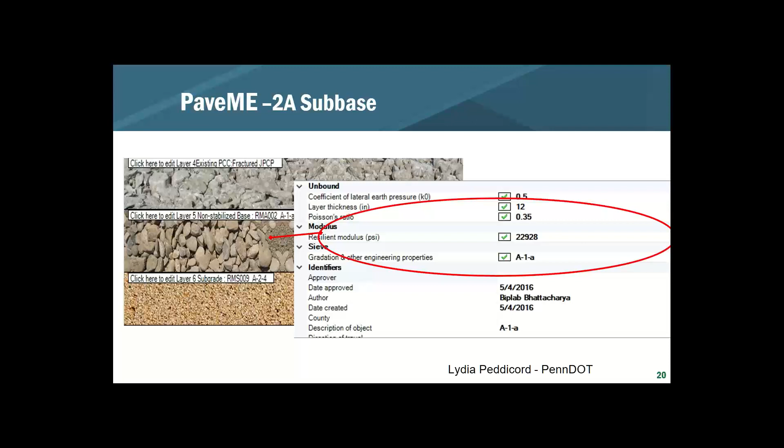Okay, so regarding the 2A subbase, this is a standard material again for PennDOT, and this information is available in their materials library. For this design, it was about 23,000 PSI for the resilient modulus used. For the subgrade, the CBR was around 3 to 5, and the resilient modulus for this was 7,500. So you would define these parameters just as you would with any other design not associated with a crack and seat or break and seat.

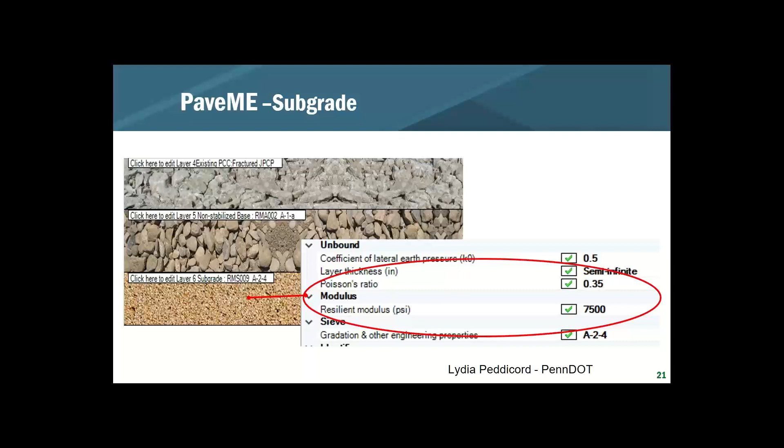So just common practice. With the overlay, the asphalt on top of this break and seat, PennDOT typically uses 2 or 3 layers. Here they had 3 layers: wearing, a binder, and a base course, where we had 1.5 inch of the wearing, 2.5 of the binder, and the base was 4.5. So with this pavement, which is a common structure that they have, they use the level 1 inputs from the materials library.

And again, Linda went over defining the level 1 inputs, so I'm not going to spend time doing that again here. All right, so then we ran the analysis, and this is what the results were.

And just as Linda had mentioned, increasing the thickness of that overlay did not help with eliminating the reflective cracking. I went quite high - I think I went up to 20 inches and it still wasn't able to meet that.

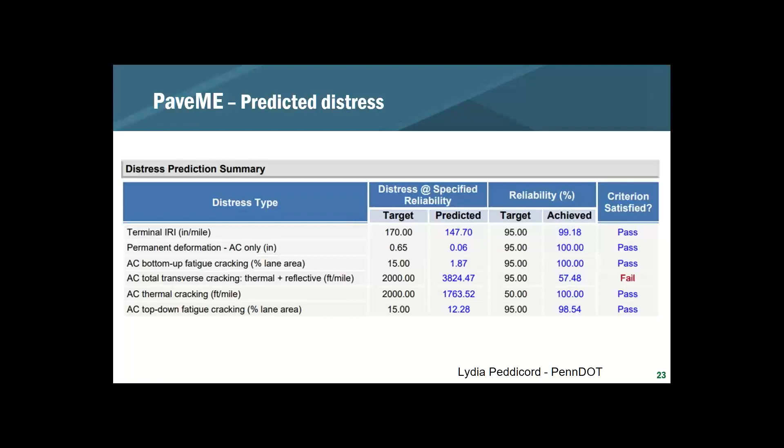So again, this isn't part of the Pavement ME inputs, but I think it helps with respect to the design philosophy. So when they constructed this, they required that - remember we talked about the break, and the break component of it is to make sure they rupture or sever that mesh.

And the subgrade's relatively soft, so one way to ensure that this occurred was that they did do saw cuts at 1/3 points of the slab, so they could guarantee that the steel was no more than 8 feet of a stretch before you would have something completely ruptured.

So they did do that with this section. They also used the guillotine breaker to fracture it. And when PennDOT does this, they have a 250-foot test section that they use to make sure things are going according to the way they would like, prior to going on with the rest of the project.

So with the guillotine, they wanted the break pattern to be every 18 to 24 inches apart, so every 1.5 to 2 feet. And then the back-calculated value they were targeting was 400 to 900 KSI, and they were verifying this with the FWD.

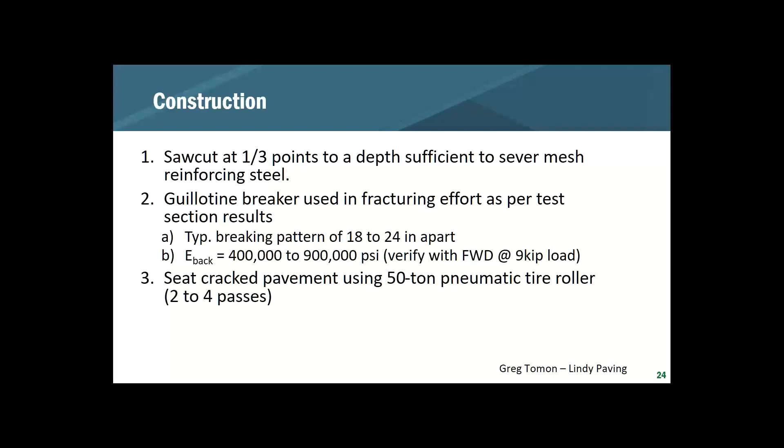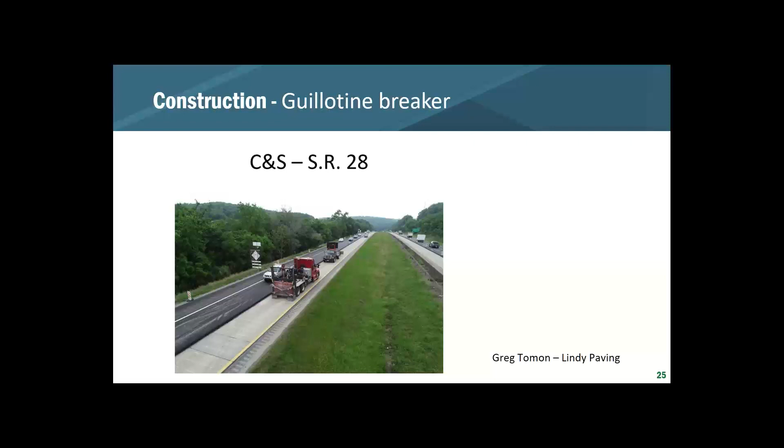So they would do the FWD testing and then ensure that they were getting the E values that they desired. This is a cracking pattern that was achieved, and I think Greg said this was actually from 79, possibly, and not 28, which is a road nearby. But you also see the core that they take to make sure that the fracture is going full depth. You also note that there's good aggregate interlock along that fractured particle, so they are getting good aggregate interlock within that layer.

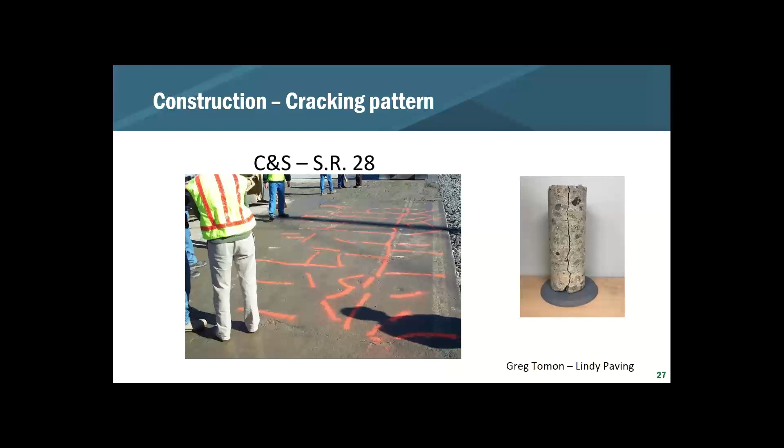And again, they used a 50% load transfer efficiency, which I think is probably a pretty realistic value. So the nice thing about doing that FWD testing is it provides you information regarding whether you're achieving the inputs that you used in Pavement ME, but also gives you information for what you can achieve when you're designing these inputs on other sections. That becomes valuable information.

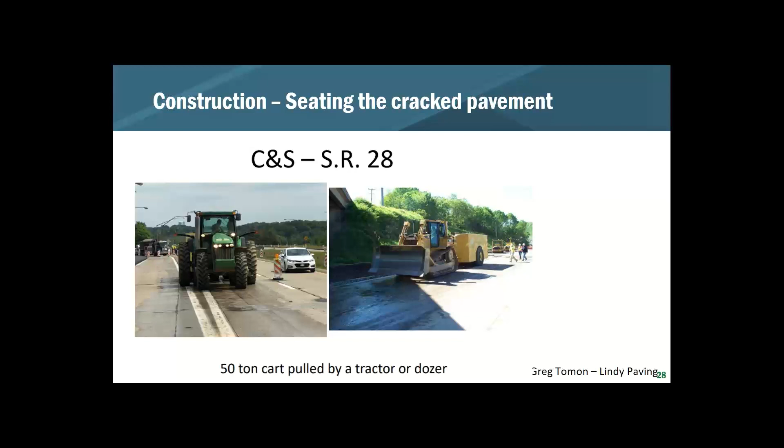And then they're seating it here, and there's the final product. So again, the whole idea of going through some of the things that PennDOT does, I think it's nice because it gives you a closed-loop system. You can't really know the elastic modulus ahead of time, but you can know what the target value is and know what you're achieving by measuring it on that test section that they have.

All right, so again, they chose not to look at rubblization on this project, because I believe the CBR is so low it would be very difficult to rubblize this 10-inch JRCP on such a soft subgrade. But I still wanted to use it as this design example since we had a lot of great information.

Going back to what we were talking about before regarding design inputs associated specifically with rubblization, focusing on those, you had the design type. Again, it's an overlay in a sense, but it's treated as a new pavement, a new flexible pavement, because that rubblized layer is treated as just a granular layer beneath it. So for the rubblized layer, that can be either treated as one layer or subdivided into 2 layers, and you can select which one's most appropriate based on deflection data.

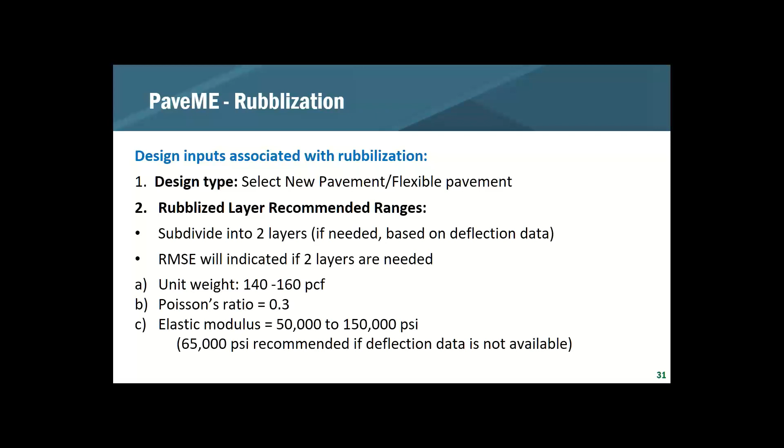All right, so again, we're going to go to a new pavement, and we have our recommended values. If we enter them in, we see that the inputs are the same regarding the base. It was constructed when the jointed reinforced concrete pavement was actually built in 1984, and then the new overlay will be placed in 2021. So we have a new pavement, a flexible pavement.

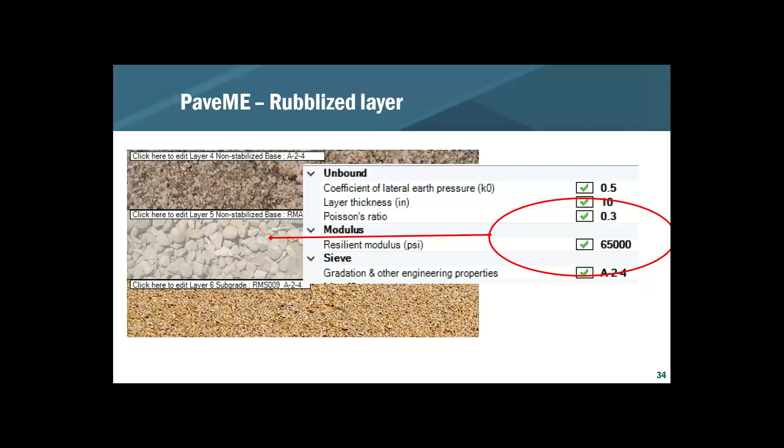Again, with this, it's relatively simple now when we're characterizing this rubblized layer. We're going to enter a resilient modulus, in this instance just 65, because we don't have a better value at this point to use. But again, we can do FWD testing under a test section to make sure we're at that value when we actually construct the road.

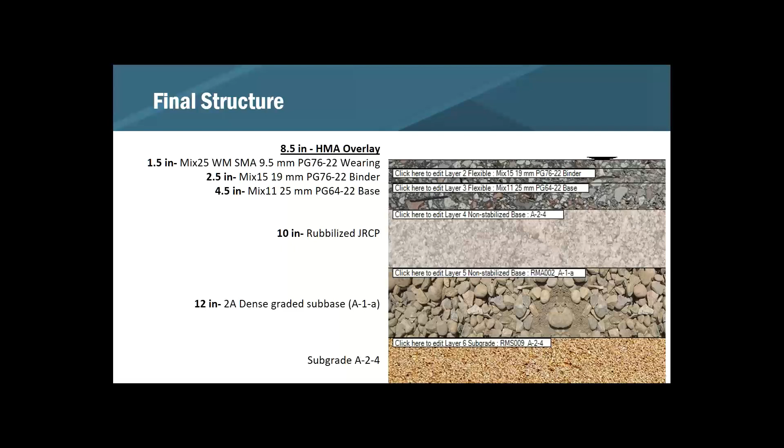So again, using the 3 layers that PennDOT used for the break and seat, and here, if we have an 8.5-inch overlay, now we have 10 inches of rubblized layer and then our 12 inches of dense graded base on top of our subgrade of about 7,500 PSI.

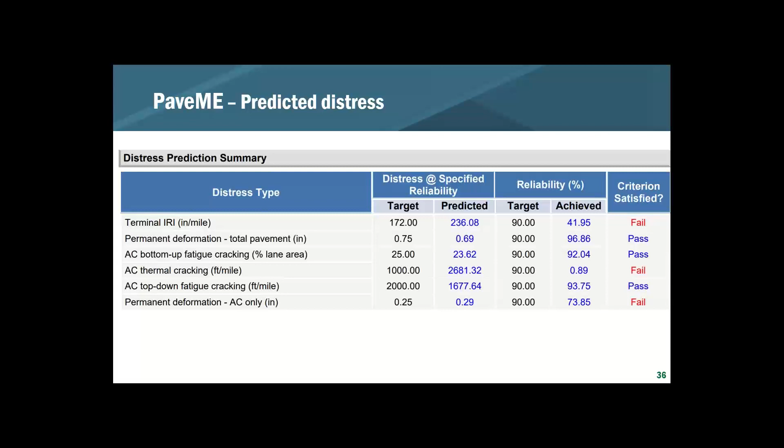And this is the results that we get. As you see, it looks like we're passing, with the exception of thermal cracking and also rutting in the asphalt layer. We're not going to design out of that, of course—that's going to be a change in the binder type. But I think PennDOT's pretty comfortable with the performance they're getting with respect to rutting in the asphalt layer and thermal cracking, so I'm not too concerned about those.

So that's all that I had to present on crack/break and seat and rubblization.

I think we have time for a couple of questions, right, Kelly? Yes, we do. We have 10 minutes to work with.

We do have one question in the poll or in the questions box. The question is, for the design you showed, should the number of lanes have been 2 or 4? I think maybe your slides showed 4, but I think it should have been 2.

Yeah, you're right. I'm not sure if there was a section along the way where it was 4 lanes, or if it was consistently 2 lanes throughout that section of roadway. But the input files that were generated had 4 lanes, so I'm thinking that at some point it went from 2 to 4. Again, this is an urban area that connects the northeast suburbs to Pittsburgh, so I'm thinking the number of lanes changes as you go outward. It was a 13.5, almost 14-mile section. So maybe Lydia might have more information on that. Yeah, from what I saw, it looked like 4 lanes, and probably at some point gets closer to the city and turns into 6 lanes.